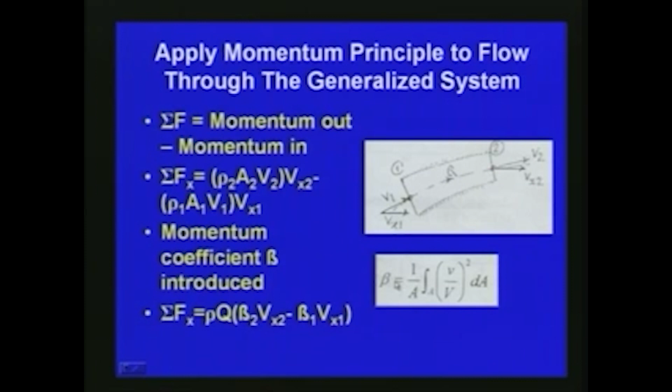Welcome back to the video course on fluid mechanics. In the last lecture, in the topic of dynamics of fluid, we were discussing the momentum principle and its applications. We have seen that in the case of a steady state system, for linear momentum, from Newton's second law, we derived the basic equation: sigma fx equals rho Q times beta 2 Vx2 minus beta 1 Vx1, where sigma fx is the total external force on the control volume, equal to the linear momentum change with respect to the system. Here beta is the momentum coefficient or momentum correction factor. Then we were discussing the applications of momentum equations.

We have seen that the linear momentum principle can be utilized for various problems, like finding the force due to flow of fluid around a pipe bend, enlargement and contraction, or finding the force on a nozzle or the outlet of a pipe, or the impact of a jet, or force due to flow around a curved vane, etc. These are different kinds of problems where we can use the linear momentum principle or linear momentum equations. That we were discussing in the last lecture, and we have seen some of the applications.

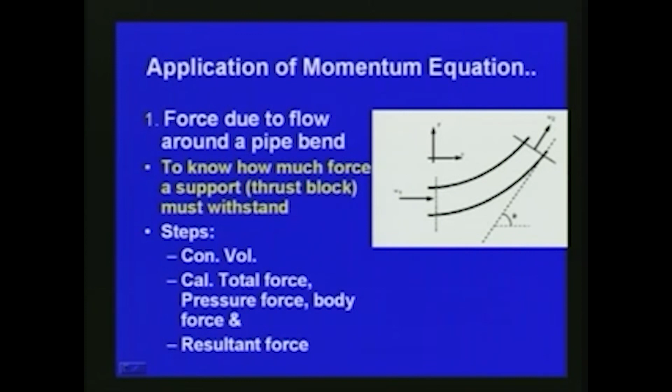The first case we discussed earlier was the force due to flow around a pipe bend. We saw the basic steps involved: we consider a control volume, then calculate the total force on the system including pressure force and body force, then find the resultant force, and equate it with the momentum change. That is what we have seen, and we derived the equation for that example, the force due to flow around a pipe bend, in the last lecture.

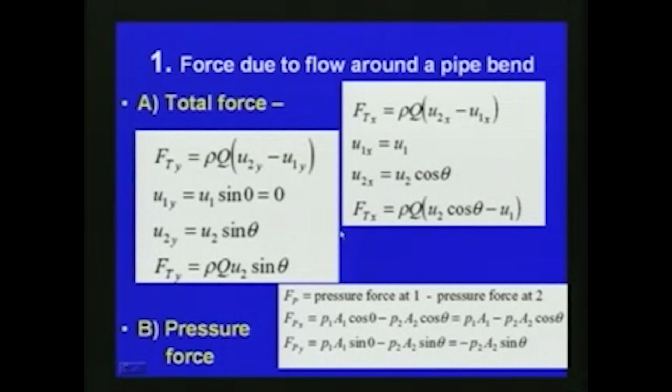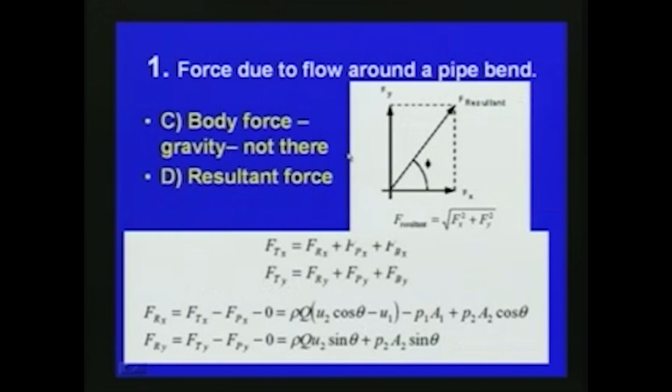Finally, the total force is equal to Frx plus Fpx plus Fbx. The body force is 0, Fp is the pressure force and Fr is the resultant force, which we have already found. So, we get the resultant force for the system: Ftx is equal to Frx plus Fpx plus Fbx, and finally Frx can be written as Ftx minus Fpx minus 0. So, this is how Frx is obtained.

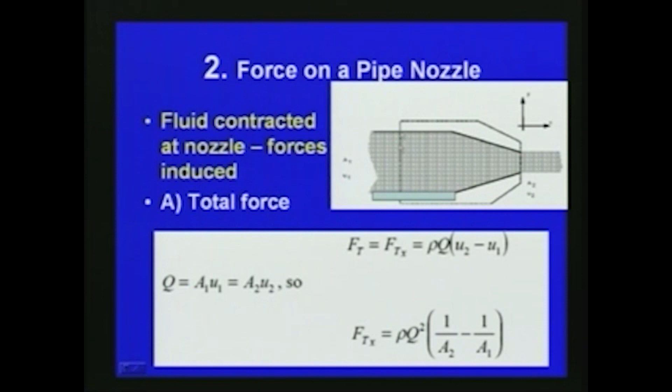Now finally, Frx is equal to rho Q square into 1 by A2 minus 1 by A1, which is obtained from the total force Ftx, which we have already found, and the pressure force, which we have already calculated as rho Q square by 2 into 1 by A2 square minus 1 by A1 square, multiplied by A1. So, the resultant force is equal to rho Q square into 1 by A2 minus 1 by A1 minus rho Q square by 2 into 1 by A2 square minus 1 by A1 square, where A2 is the cross section at the nozzle location and A1 is the cross section at section 1. So, this gives the resultant force.

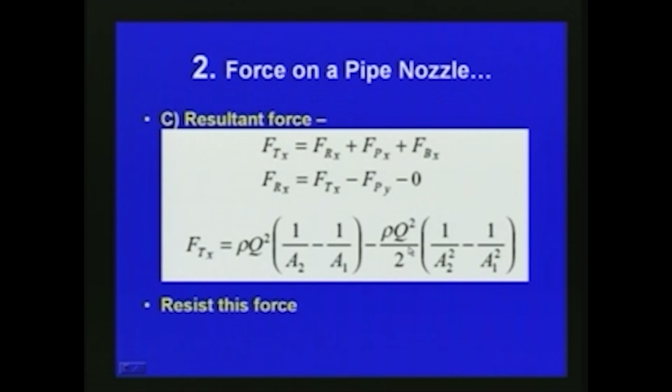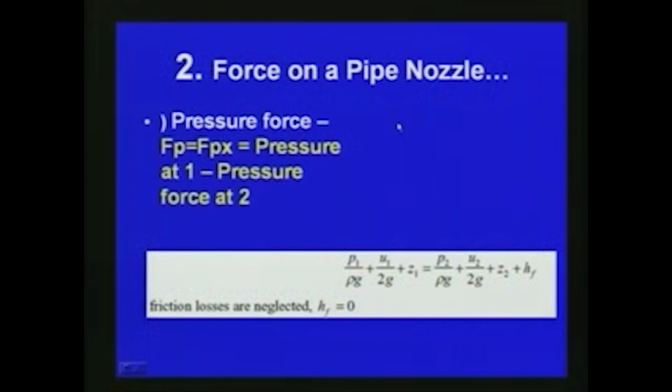This resultant force is the force acting due to the effect of the nozzle. The force on the pipe is given by this resultant force. This is the force which resists the liquid passing through the nozzle. So, this is the second case we discussed, the force on a pipe nozzle, as shown in this figure.

Now we will discuss another case, which is the impact of a jet on a plane. As we have seen, there are a number of applications of the linear momentum equation. So, the third case is the impact of a jet on a plane. Here you can see a jet coming and impinging on a plate. Let us assume in this third case the jet is acting at 90 degrees, impinging on the vertical plate. We want to find the force on the plate, or the reaction of the plate.

So, this is what we want to find out with respect to this case, which is the third case, the impact of a jet on a plane. Here you can see that the pressure force is 0, since everything is open to the atmosphere. So, the jet is coming through the atmosphere and impinging on a flat plate placed vertically.

So, say for example, if this is the plate, then the jet is coming vertically with respect to this plate. So, the pressure force here is all 0 or atmospheric, and this is the control volume which we consider, with respect to this plate where the jet is impinging on it. The body force in this particular case is ignored.

So, the total force Ftx is equal to rho q multiplied by u2x minus u1x. We are finding the force in the x direction. So, total force Ftx equals rho q into u2x minus u1x, where u2 is the velocity in the x direction after the jet has impinged on the plate, and u1 is the velocity of approach. So, this is equal to rho q, total force equals minus rho q into u1x.

So, here you can see that x direction is concerned and considered. This plate is placed vertically, so u2 in the x direction, u2x, is 0, since in the x direction only the y direction velocity is there. So, u2 is in the y direction, both upward and downward. You can see that x direction velocity u2x equals 0, since the plate is placed vertically.

So, total force Ftx equals rho q into u2x minus u1x. Since u2x is 0, this is equal to Ftx equals minus rho q u1x. Due to symmetry, the force in the y direction, Fty, is equal to 0. So, finally the resultant force we can write is equal to minus rho q into u1x. So, this gives the resultant force.

So, finally, for this particular case, this is a simple case where a jet is hitting at 90 degrees on a flat plate. Here we do not consider friction on the plate; we assume the plate is smooth. So, finally, as far as the x direction is concerned, the resultant force is given as minus rho q u1x, where rho is the density of the fluid, q is the discharge of the jet hitting the plate, and u1x is the velocity of approach in the x direction.

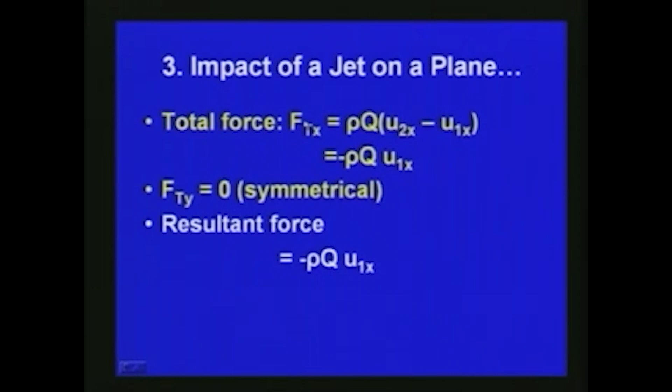So, this gives, if a jet is hitting on a flat plate, in the x direction, the resultant force, equal to minus rho q u1x. So, this is the third case. Here we have analyzed the impact of a jet on a flat plate or on a plane like this. So, this is the third case.

So, now we will be discussing the fourth case. The fourth case concerns the application of the linear momentum equation for the force on a curved vane. You can see that many applications exist where jets come and hit on curved vanes like this. So, the jet action will be coming, and then it will be hitting on a curved vane like this.

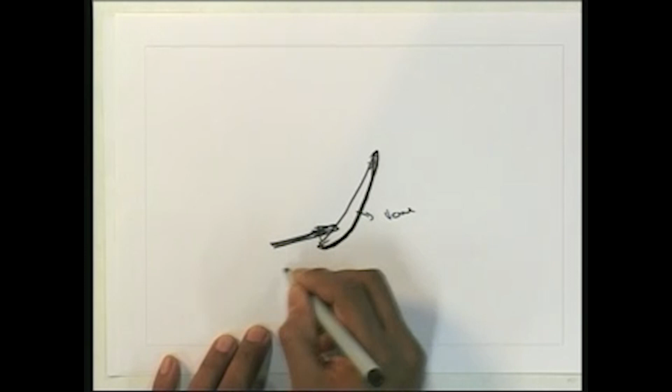So, there are many practical cases where these kinds of problems occur. Now for this particular case we want to find out the force. The jet is coming in this direction, and here this is the vane and this is the jet. We want to find out how much force is exerted by this jet on this vane, or the curved plate which we consider.

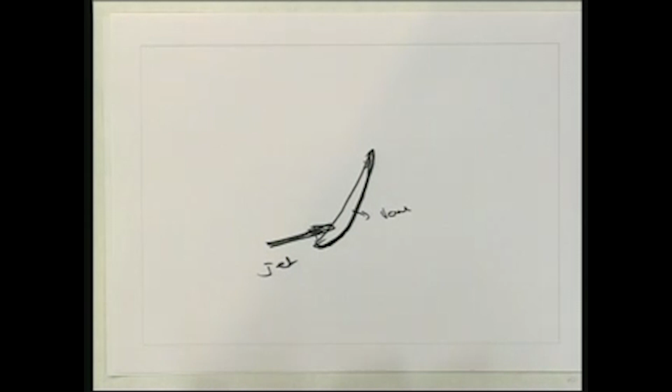Here, similar to the pipe, the pressures are equal. You can see that everything is atmospheric, so we do not consider the pressure force. Pressure force is atmospheric, so we can consider it 0, which is very similar to the pipe case which we have seen. And in this particular case we also do not consider the body force, so Fbx is equal to 0.

Now we can find out the total force with respect to this figure. The total force in the x direction is equal to rho Q into u2 minus u1 cos theta. Here u2 is in this direction, which is deflected, and if you consider this as the normal direction, the total force with respect to the x direction will be rho Q into u2 minus u1 cos theta, where this is u2 and this is the angle theta. So the total force in the x direction is equal to minus rho Q into u1 minus u2 cos theta.

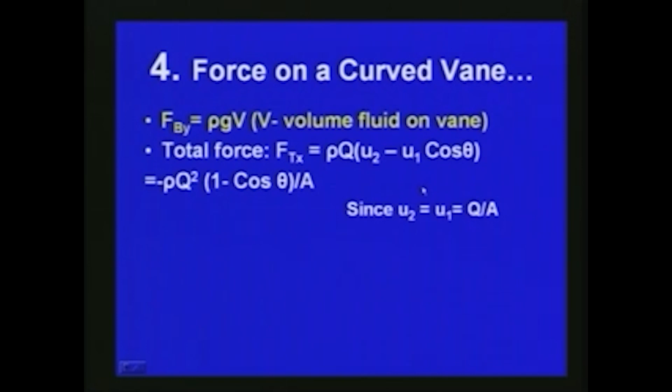Finally, this can be written as minus rho Q square into 1 minus cos theta divided by A, which is the area of cross section of the jet which is coming here. Since u2 is equal to u1, which is equal to Q by A, where Q is the total discharge, we can substitute u2 and u1 with Q by A. Finally, the total force is minus rho Q square into 1 minus cos theta by A. This gives the total force on the curved vane.

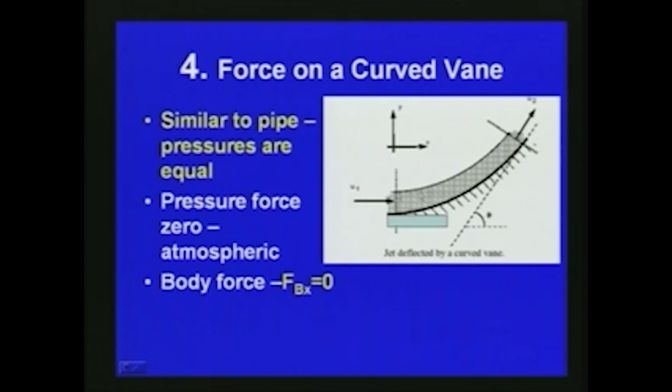Finally, the total force in the y direction, Fty, is equal to rho Q into u2 sin theta minus 0. Here you can see this is u2 sin theta, and it is coming in this direction. In the other direction there is no velocity, so Fty is equal to rho Q into u2 sin theta. This can be written as rho Q square by A into sin theta. Pressure force is not considered here, and there is no body force in the x direction.

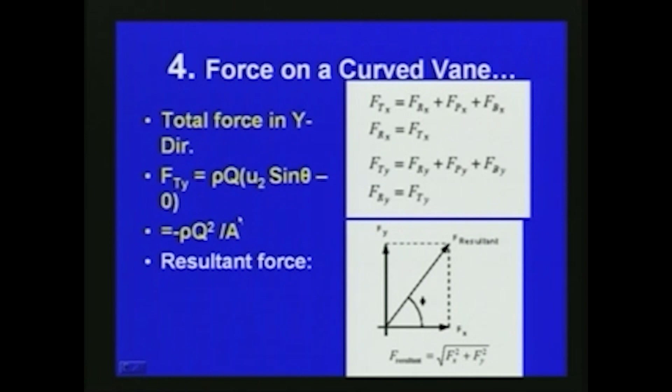So the resultant force Frx is equal to Ftx, and with respect to the y direction, Fry is equal to Fty minus Fby. The resultant is equal to the square root of Fx square plus Fy square. This gives the resultant force on the curved vane. So, we have now seen various cases.

So, first the various cases. The first case is the force due to flow around a pipe bend, the second one is force on a pipe nozzle, and the third one we have seen is impact of a jet on a plane, and then the fourth one is force on a curved vane, as we have analyzed here. And now the fifth case which we will be discussing here is jets on turbine blade.

So, you can see that we will be analyzing many cases, like the Pelton wheel or turbine problems. You can see that the jet will be coming like this, the flow with respect to jet action, and then there will be a wheel with various vanes like this. Due to the jet action it will start rotating. So, here we can use the principle of the linear momentum equation which we have seen, the same principle, to analyze the impacts of jet on turbine blades.

So, here it is depicted in this slide. The jet of water is coming through the nozzle like this. This is the jet of water, and the Pelton wheel is mounted on an axle, and due to the jet action a force is supplied, and due to that the turbine wheel is rotating. Here the jet can be coming directly at 90 degrees, perpendicular to the vane, or it can also be inclined.

As you can see, here the jet is coming in the horizontal direction and is also deflecting in the horizontal direction. But it can also be inclined like this. In this slide, the jet is coming in the horizontal direction, but due to the nature of the vanes, it can also be deflected at an angle theta like this. So, u2 is deflected in this direction and the other way, at an angle theta.

For this kind of problem, let us consider a control volume, as in the previous cases. The control volume is shown here, with the x axis here and the y axis here. Again in this particular case, we do not consider the pressure force; the pressure is atmospheric, so we consider the pressure force as 0. We also do not consider the body force, due to the specific nature of the problem. The total force in the y direction will be 0, due to symmetry and the nature of the problem. Then the total force in the x direction, if the jet is deflected at an angle theta like this.

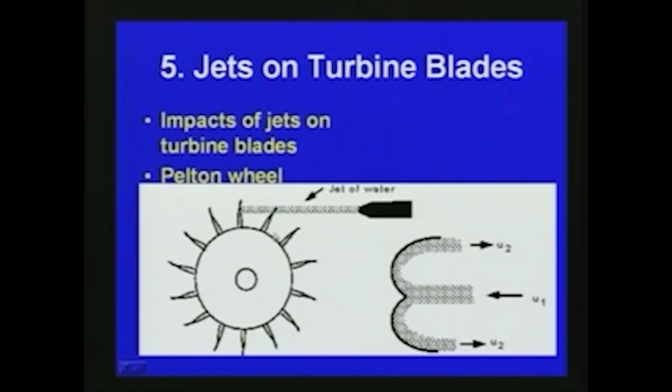So, finally, the resultant force F T x is equal to rho q into u 2 cos theta plus u 1. Like this we can analyze the force. Here we have finally found the total force acting on this Pelton wheel or on the turbine blade. In a Pelton wheel we have considered the turbine blade.

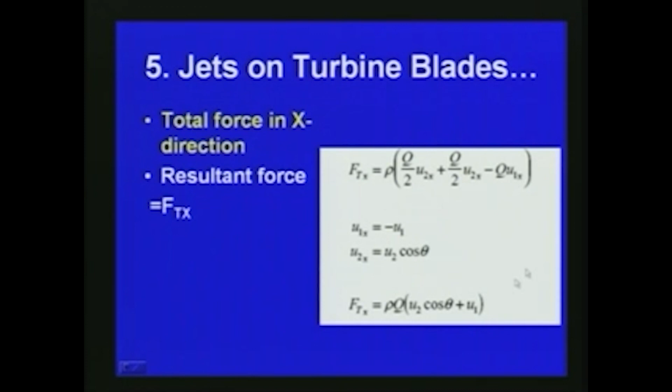How much force acts upon the turbine blade is calculated from this expression: F T x is equal to rho q into u 2 cos theta plus u 1, where rho is the density, q is the discharge of the jet, u 1 is the velocity of the jet, and u 2 is the velocity after deflecting from the turbine blade. Like this, the force of jets on turbine blades can be calculated.

So, this is the fifth case we have analyzed for the application of the linear momentum equation. Now, the last case we will be discussing is the force due to a jet hitting an inclined plane. We have seen that when the plate is placed vertically, the analysis is very simple, as we have already seen in the previous case, the impact of a jet on a plane placed perpendicular. Here, in the last case, we discuss the force due to a jet hitting at an angle, on an inclined plane.

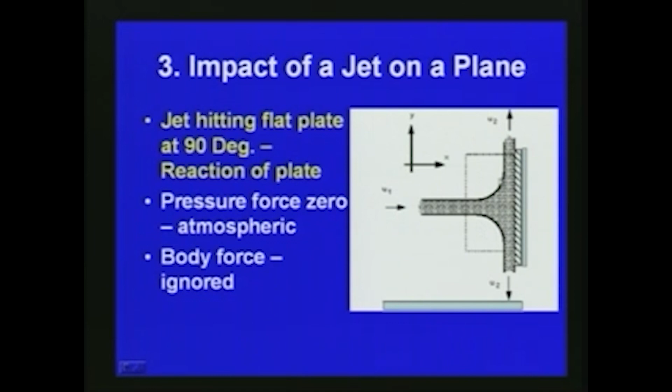So, here the velocity of the jet is u1, and in the previous case we have seen earlier that if it is normally placed, the velocity will be the same to both sides, u2 and u2. But here you can see that due to the inclination of the plane, the velocity in this direction is u2, and in the other direction it is u3. So it is not symmetrical, the plane is inclined, so the velocity in this direction is u2, and in the downward direction it is u3. So, here we consider the angle theta.

So, now to analyze this problem, we will be considering the problem like this. The same plane we consider, the jet is in the horizontal direction, and the plate on which the jet is hitting is inclined. But in a very similar way we can consider the plane is vertical and the jet is inclined. So, here you can see it is the very same problem. We are considering the plate is vertical like this, and then the jet is acting inclined.

So, the actual case is the plate is inclined and the jet is coming horizontal. What we are converting this problem into is: we place the plate as vertical, and then we consider the jet is acting inclined. That is the way we are analyzing this problem. So, the diagram here is rotated for analysis. Now we can see this is angle theta, and u1 is the jet velocity, and x is in the horizontal and y is the vertical direction,

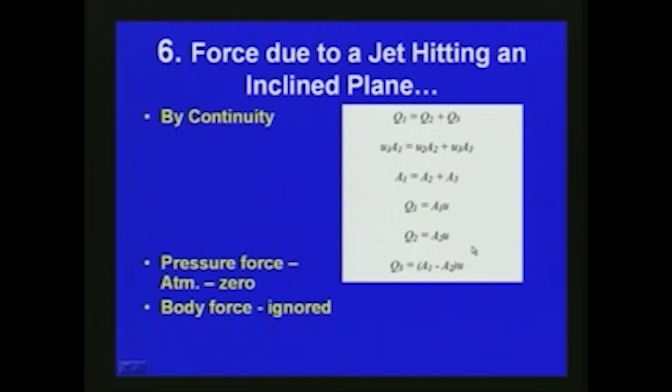So, with respect to this, after the figure is rotated here, you can see that in the x direction U2x and U3x are 0. So, U2x is 0, U3x is 0. So, we get U2x is equal to U3x is equal to 0, since the jets are parallel to the plate. So, finally, this expression becomes, since U1x is equal to U1 cos theta, so this angle is theta. So, U1x is equal to U1 cos theta.

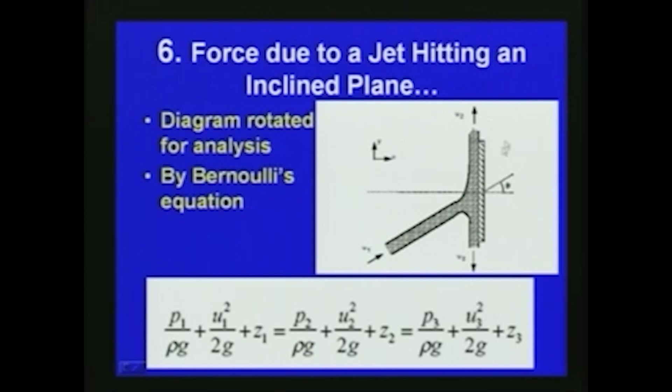So, finally, we simplify the equation to Ftx, the total force in the x direction, is equal to minus rho Q1 U1 cos theta. So, this will be the force acted upon by this inclined jet on this plane, in this particular case which we consider, the plane is inclined and the jet is horizontal. So, finally, the expression is Ftx is equal to minus rho Q1 U1 cos theta. So, like this we can analyze what will be the force due to a jet hitting an inclined plane, or say the plane is vertical and the jet is inclined. So, both cases we can analyze.

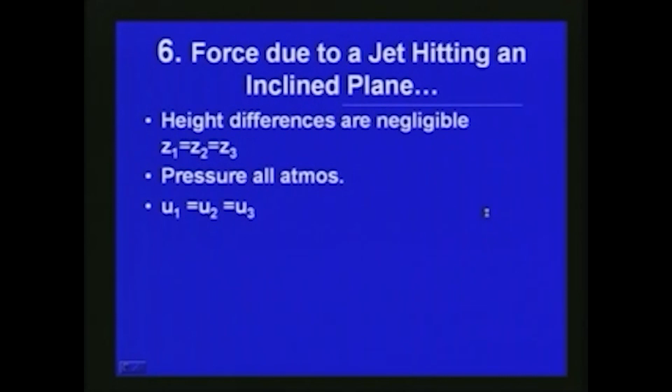So, finally, the resultant force exerted on the fluid: body force is neglected, pressure force is atmospheric, so that we do not consider. So, in the x direction Frx is equal to minus rho Q1 U1 cos theta. So, this is the resultant force exerted on the fluid, and then in the y direction, Fty is equal to 0 in this particular case. So, finally, the resultant force R is equal to minus Frx, which is the reaction, or with respect to the jet, the force acted by the plate. The reaction force will be R equal to, in the opposite direction, minus Frx. So, that is equal to rho Q1 U1 cos theta.

So, this gives the reaction force in the opposite direction, that is minus Frx. So, like this we can analyze the resultant force acting by a jet hitting an inclined plane. Also, from what we have seen so far, we can also find out the discharge in each direction, Q1, Q2, Q3, that we have seen here. So, that also can be calculated. Discharge in each direction can also be found in a very similar way. So, this is the sixth application we have discussed.

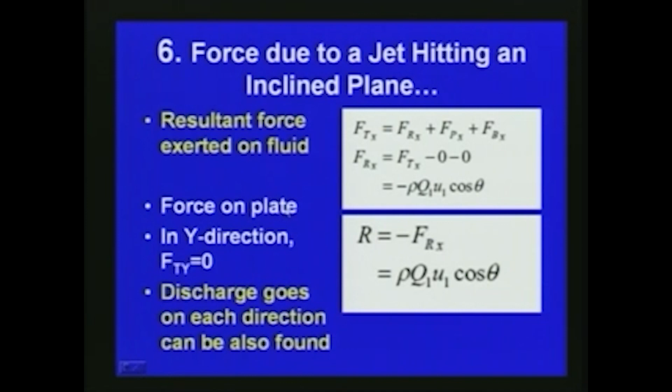So, now, from Newton's second law we have derived the linear momentum equation, and then we have seen various applications of this. So far we have discussed various applications. So, now from the applications we can see some interpretations. We say here the linear momentum, we have to always consider the direction, whether it is x direction or y direction. So, we can say that the linear momentum is directional.

So, that is obvious; always we have to say which direction it is acting. So, that is the first interpretation, and then, most of the cases we have discussed are at steady state condition. So, for steady state flow the time rate of change of momentum is 0, so that is not considered. So, most of the examples we have considered are at steady state condition, and then we have also seen we are using Newton's second law. So, we are considering the external forces. So, we have to consider the sign, that means in which direction the force is acting, whether plus or minus; the sign is important.

So, the algebraic sign of the external force is to be considered, and also, as far as the control volume which we consider, we start the analysis by considering a control volume. So, for the control volume considered, only external forces acting on the control volume are to be considered for the problems which we have seen here, and then also in a very similar way.

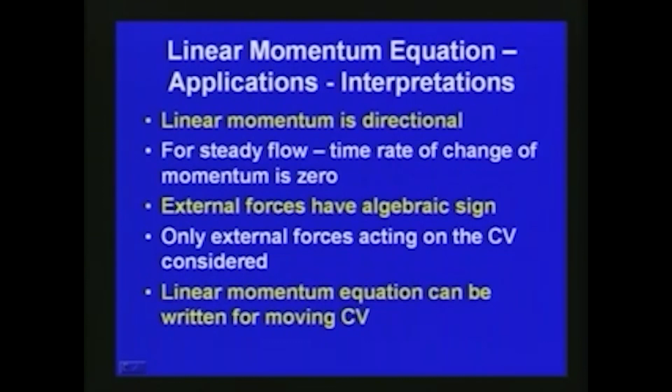The cases we have considered so far are fixed control volume, but in some cases, like when the wheel is rotating, or when the plate is moving with respect to the jet action, the case is one of a moving control volume. So now the jet is coming, and, in a very similar way, with respect to the jet movement the control volume is also moving. The linear momentum equation can be transformed for the moving control volume, say for moving plates and vanes.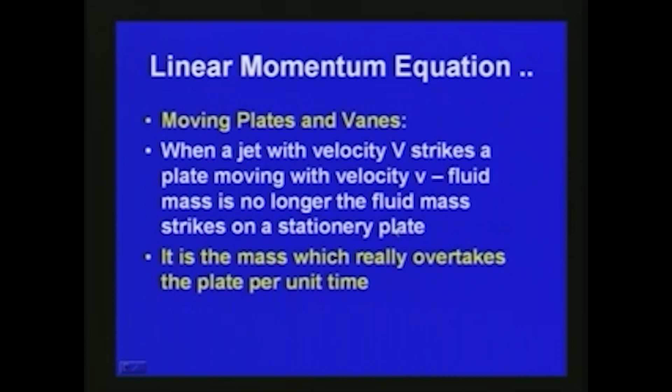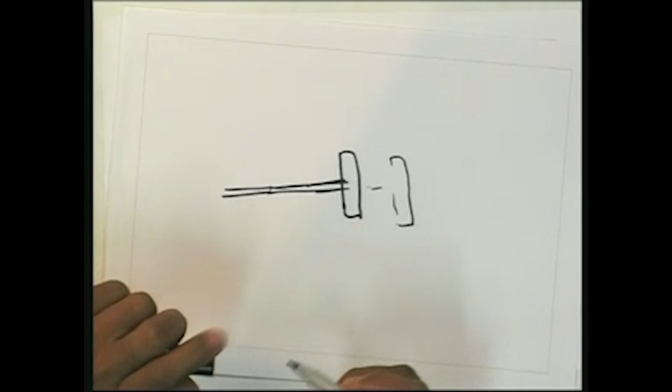When a jet with velocity V strikes a plate moving with velocity small v, the fluid mass is no longer the same as the fluid mass striking a stationary plate. As I mentioned, the plate is there, the velocity of the jet is capital V, and the plate is now moving with a velocity of small v. Unlike the fixed plate case, it is not the same mass that is hitting the plate, since the plate is also moving. Here is the plate in its initial position, the jet is coming and hitting, and after some time the plate has moved. So the fluid mass is changing. The plate moves with velocity small v meters per second and the jet has capital V meters per second.

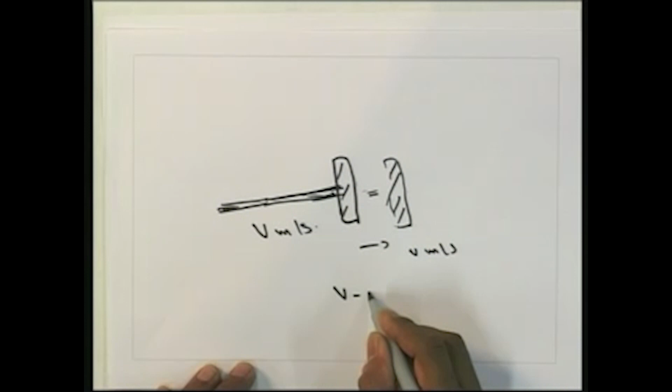Then we will find the mass which really overtakes the plate per unit time. We have to consider the relative velocity, and the mass overtaking the plate per unit time, when the plate or the vane is moving. Here, capital V minus small v will be the relative velocity, and that will be used in the calculation.

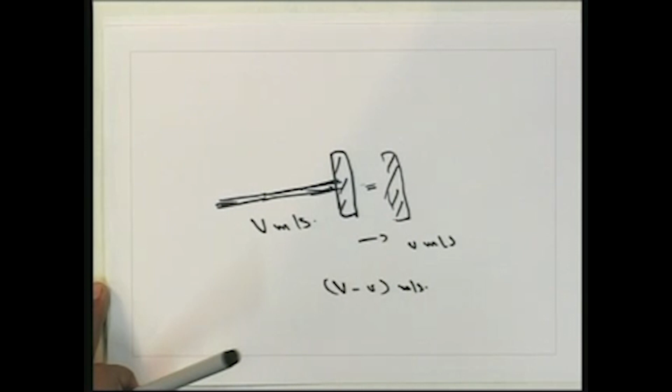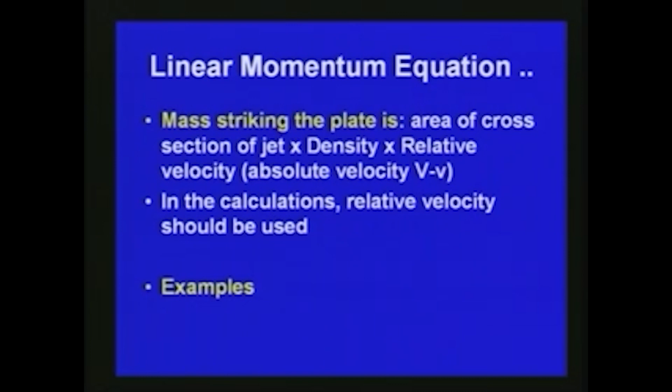In the next slide, for the mass striking the plate, we use the area of cross section of the jet. If the jet has an area of cross section capital A and the density is rho, then we multiply by the relative velocity, the absolute velocity capital V minus small v. So the mass striking the plate per unit time is Q equal to A times rho times (V minus v): the velocity of the jet minus the velocity of the plate or vane. So the relative velocity should be used in the calculation. With reference to this, we will discuss a few examples.

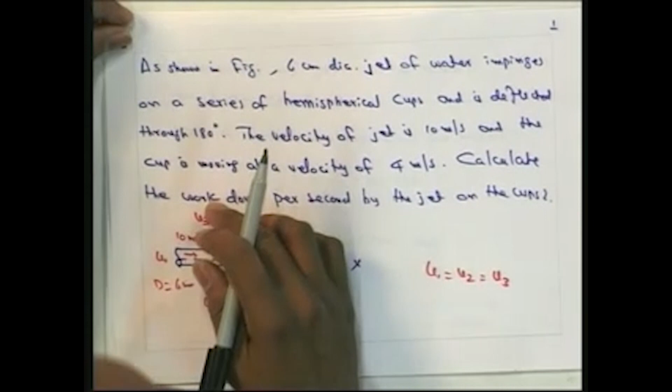The first case is a problem like this. There is a curved vane, plate or cup, and a jet is coming and hitting on it, and the vane or cup itself is moving with a velocity. We want to find the work done per second by the jet on the cup. The problem statement is as shown in the figure: a 6 centimeter diameter jet of water impinges on a series of hemispherical cups and is deflected through 180 degrees. So the diameter of the jet is 6 centimeters, and the jet is deflected by 180 degrees.

The velocity of the jet is 10 meter per second and the cup is moving at a velocity of 4 meter per second in the x direction. Calculate the work done per second by the jet on the cups. Here you can see that the jet is coming in this direction and a curved vane is placed like this, and the vane is moving with a velocity of 4 meter per second.

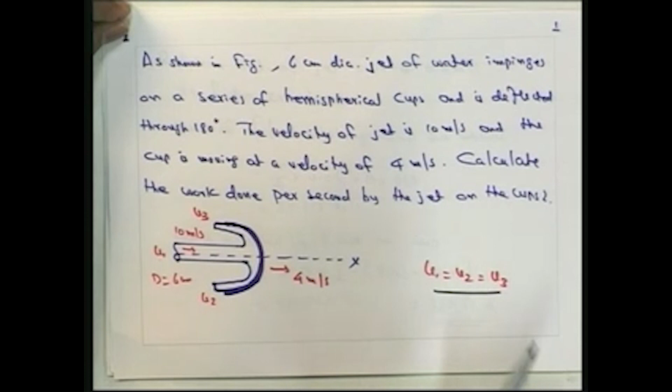The jet velocity is 10 meter per second, and if u1 is the jet velocity, then after the jet reaches the cup, it will be deflecting, and it is deflecting at 180 degree. So u3 is the velocity in this direction and u2 is the other downward direction. Since we consider the atmospheric pressure here, u1 is equal to u2 is equal to u3 for this particular problem. We want to find out the work done per second by the jet on the cup.

Now, since the jet is moving with a velocity of 10 meter per second and the cup is moving with a velocity of 4 meter per second, the relative velocity of the jet is equal to 10 minus 4, that is equal to 6 meter per second. Also in this particular problem we do not consider the friction. So, no friction is considered.

The mass of the fluid striking the cup per second: the diameter of the jet is given as 6 centimeters. So the area of cross section of the jet is pi by 4 into 0.06 square, that is pi d square by 4, into the velocity of 10 meter per second and then the density is 998. Finally, we get 28.217 kilogram per second. This is the mass of fluid striking the cup per second.

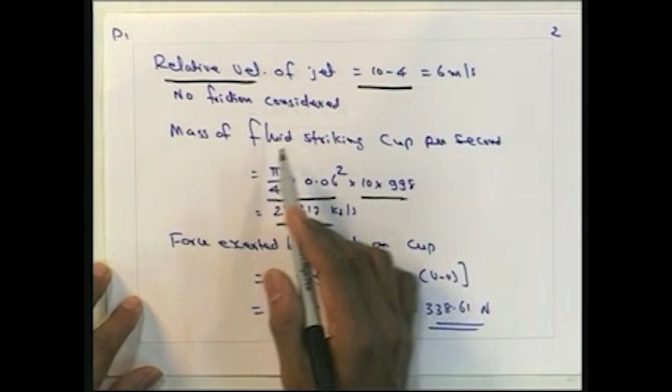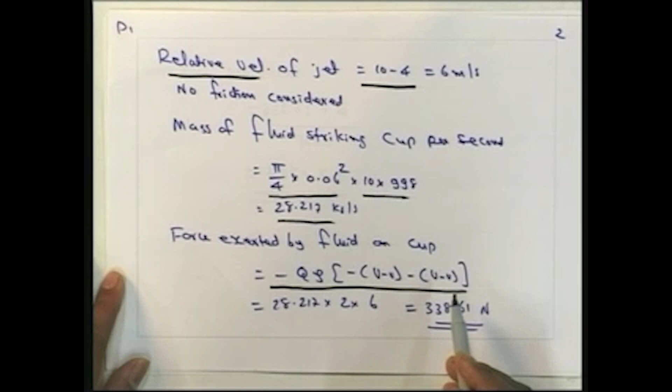Now we want to find out the force exerted by fluid on the cup. That is obtained with respect to the equation we have derived. The force exerted by fluid on the cup is equal to minus q rho into the velocity change or the relative velocity. You can see here with respect to the figure, it is both directions, so we have to consider both directions. The force exerted by fluid will be minus q into rho, where q is the discharge and rho is the density, into the velocity change, 2 times. Here you can see it is coming both ways.

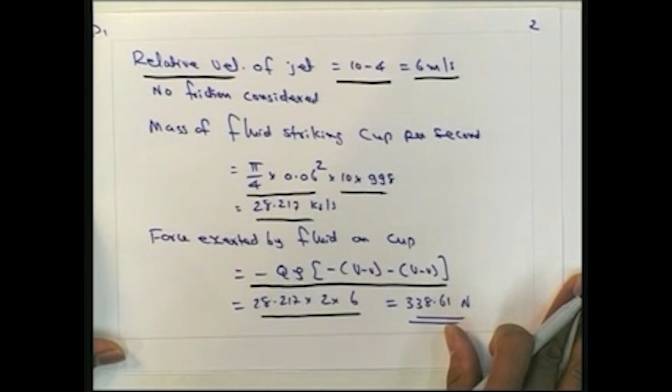That is equal to, we have already found the mass of fluid striking the cup is 28.217, into 2 times into the relative velocity we have calculated, which is 6 meter per second, into 6. So that gives us 338.61 Newton. This is the force exerted by fluid on the cup, 338.61 Newton.

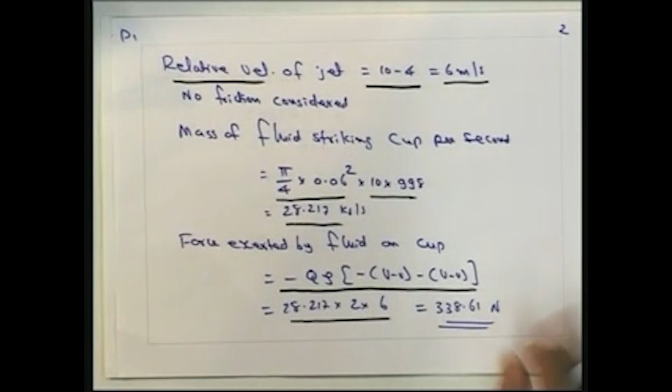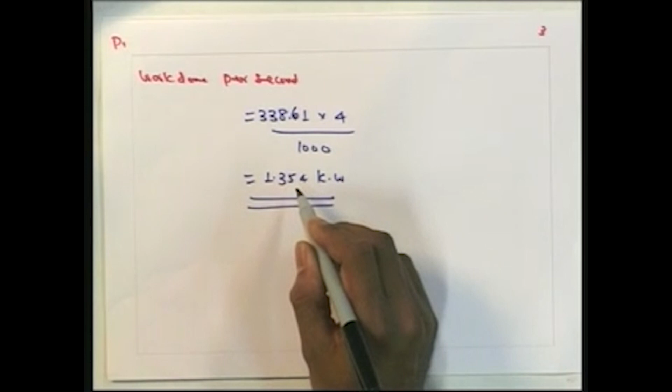And now finally, work can be found by, here you can see that work is equal to force into displacement. The cup is moving at 4 meter per second. So the work done per second is the force exerted by fluid on the cup multiplied by, that is 338.61 multiplied by this 4 meter per second, which is the movement of the cup, divided by 1000. That will give 1.354 kilowatt. This gives the work done per second for this problem.

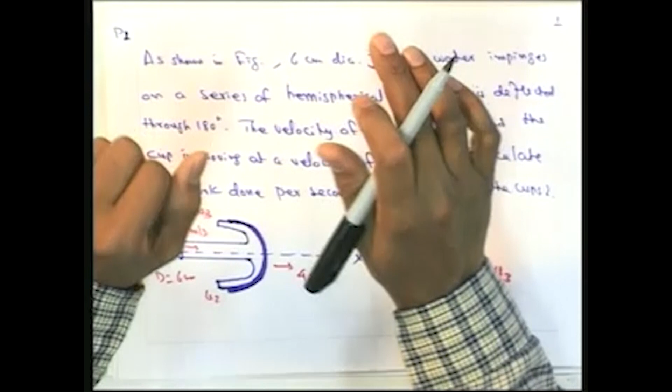Here we have analyzed a problem with relative movement where the vane or the cup is moving with respect to the jet action. What we have to note here is that while finding out the force exerted on the cup, we have to consider the relative velocity. The relative velocity is considered in this particular case, since the cup is also moving in the direction of the jet.

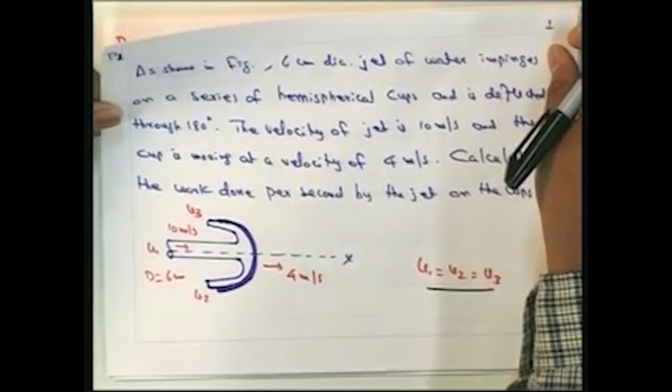So, this is the first example, the first problem, and for the second example, we will be considering another example.

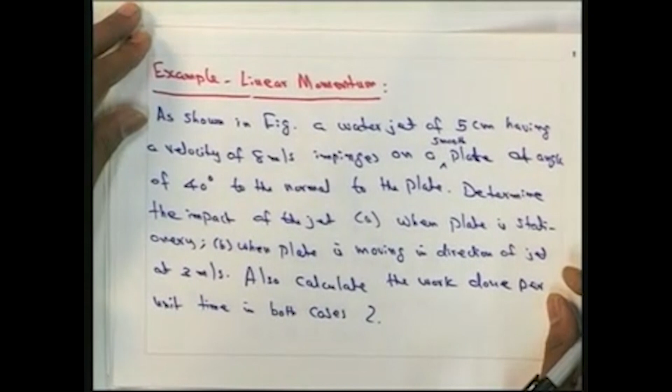Second case is for a jet hitting an inclined plane. The problem statement is as shown in this figure, where a jet is hitting on an inclined plate like this.

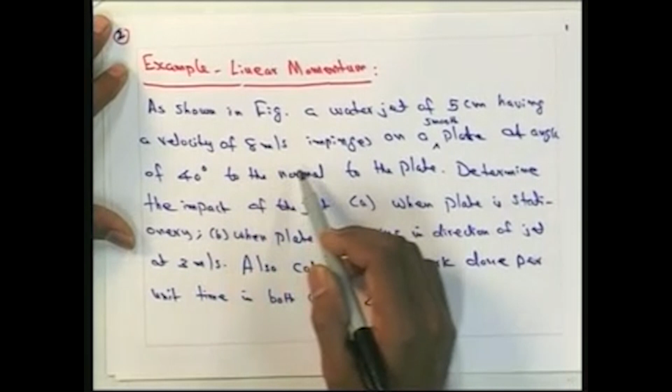We have to find: a water jet of 5 centimeter diameter having a velocity of 8 meter per second impinges on a smooth plate at an angle of 40 degree to the normal to the plate. We have to find out the impact of the jet when the plate is stationary, case A, and case B when the plate is moving in the direction of the jet at 2 meter per second. Also calculate the work done per unit time in both cases.

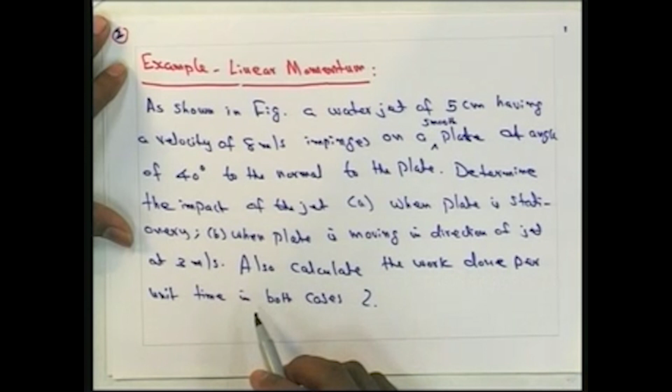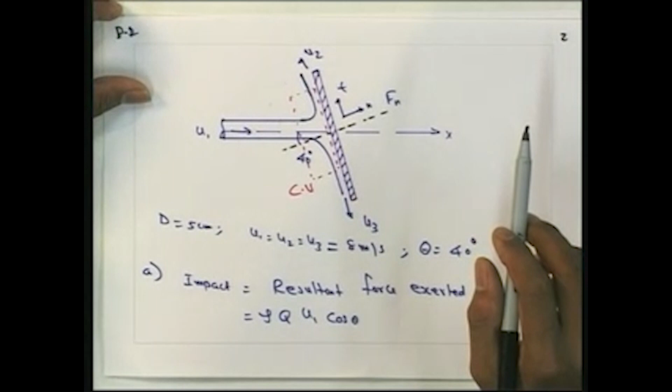As we have seen in the previous discussion, since the pressure force is atmospheric, we can say that U1 is equal to U2 is equal to U3, where U1 is the jet velocity, U2 is the upward direction, U3 is the downward direction. So U1 is equal to U2 is equal to 8 meter per second, which is the given value, and this angle theta is given as 40 degrees.

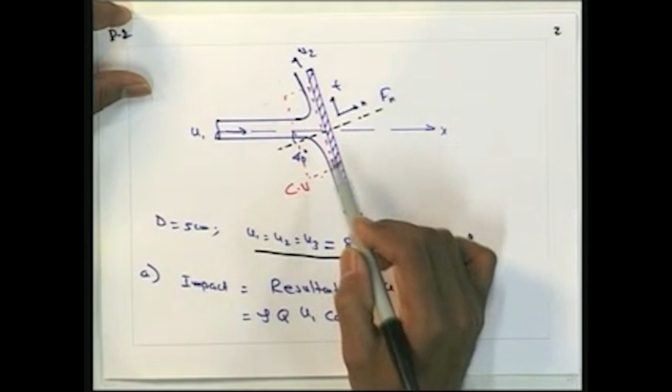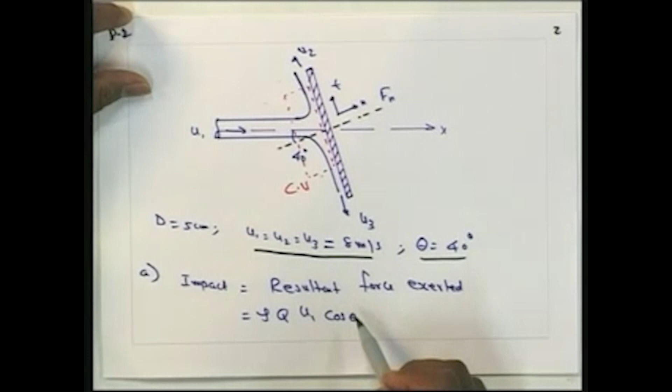As we discussed, we will be considering a control volume as shown here. From the previous expression which we have derived, the impact of the jet is obtained as resultant force exerted, that is equal to rho Q into U1 cos theta, where rho is the density of the fluid, Q is the discharge of the jet, and U1 is the velocity at angle theta.

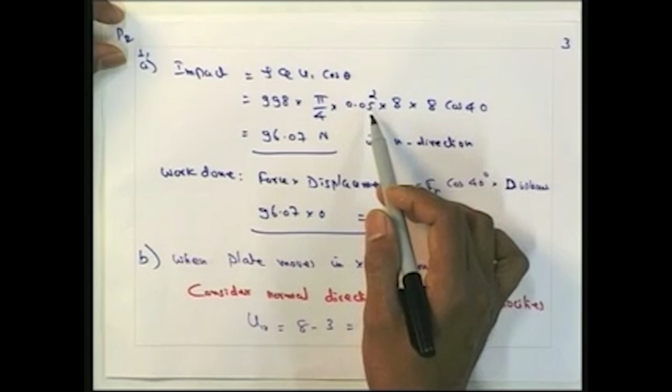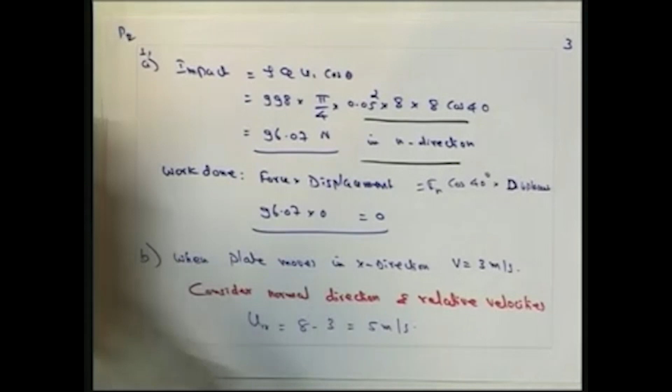So the impact of the jet is equal to rho Q into U1 cos theta. Now the impact can be calculated for case A when the plate is stationary. Impact is equal to rho Q into U1 cos theta, where rho is 998, Q is pi by 4 into the diameter of the jet, 0.05 square, into U1 is 8. So 8 into 8 cos 40. This gives the impact on the plate as 96.07 Newton in the direction shown here, Fn. So this gives the impact of the jet on the inclined plate, that is 96.07 Newton.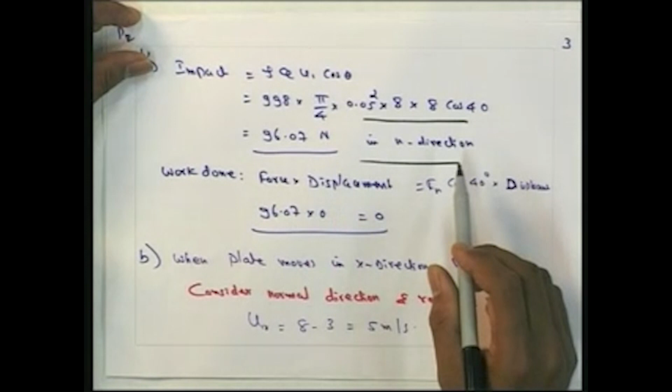Then for work done, here you can see that the plate is stationary. So since there is no displacement of the plate, work done is force into displacement, which is 0. So work done in this particular case is 0.

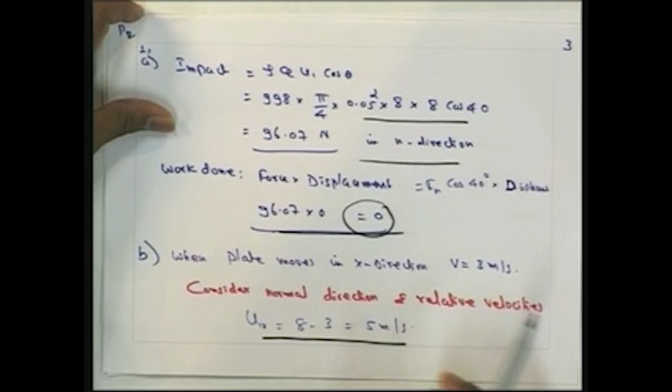For case 2, when the plate moves in the x direction, V is equal to 3 meter per second. If you consider the normal direction and relative velocity, the plate is moving with 3 meter per second and the jet velocity is 8 meter per second, so the relative velocity is equal to 8 minus 3, which is 5 meter per second.

Now the impact of the jet will be: impact is equal to rho into Qr into U1r cos theta. So rho is 998, into pi by 4 into 0.05 square, that gives Qr, into 5 into 5 cos 40. That gives 37.53. So this will be the impact whenever the plate is also moving relative to the jet force.

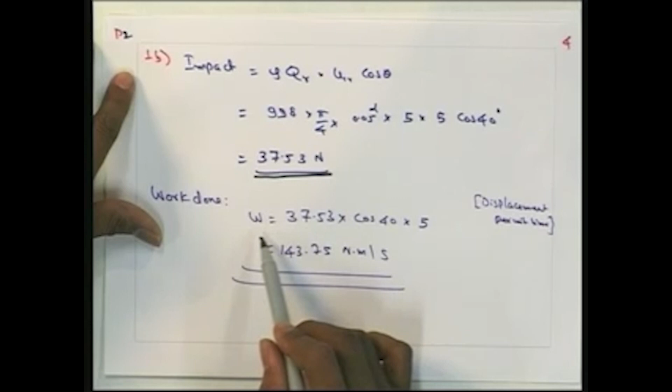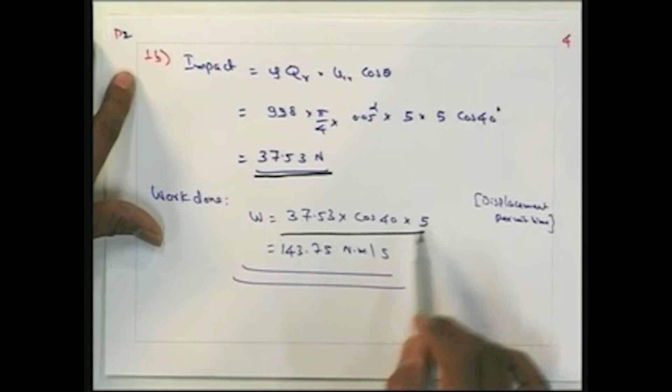So the relative velocity will be 8 minus 3 into 8 minus 3, that is equal to 5 meter per second. With respect to when the plate is also moving, the work done W is equal to the force into the displacement per unit time. So 37.53 into cos 40 into 5, that gives 143.75 Newton meter per second. So this is the work done.

So like this, we can solve most of these problems by considering the linear momentum equation, either for a fixed control volume or for a moving control volume.